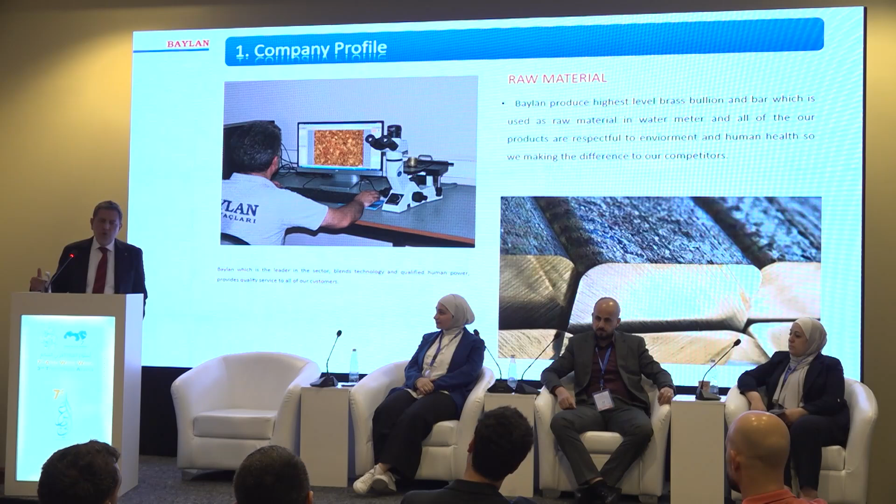If you have a brass body water meter, the client or the utility will ask you for a particular standard, like MS58. In this case, you have to make sure of the content of your raw material before going for casting or forging. Some parts are forged and some cast.

In the Baylan production plant, after we keep the content as required, we are not satisfied with this — we go and check the structure of the material. If it's not perfect, it's refused by production and goes back to the furnace.

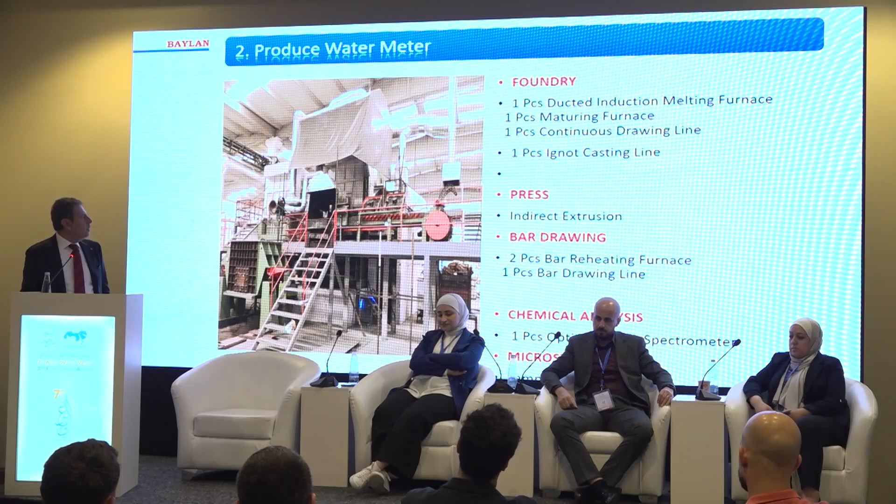Here are some views from the production plant. You see the furnace here, the casting, the design. Just wanted to show you some illustrations from the plant to give you an idea.

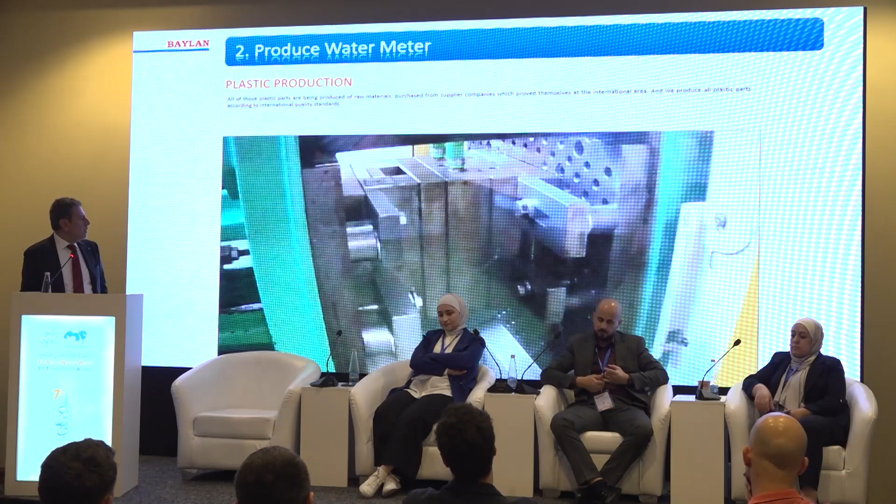Even the plastic parts for the mechanism are produced in-house, designed in-house. Here in the first picture you can see the assembly of the mechanism of the water meters. When it's finally ready as one piece, you have the lower body and the upper body, depending on the design, and then these three main parts go for final assembly and testing.

They go to the test laboratory, 100%. This is the research and development department I mentioned earlier. Some types of the meters we supply.

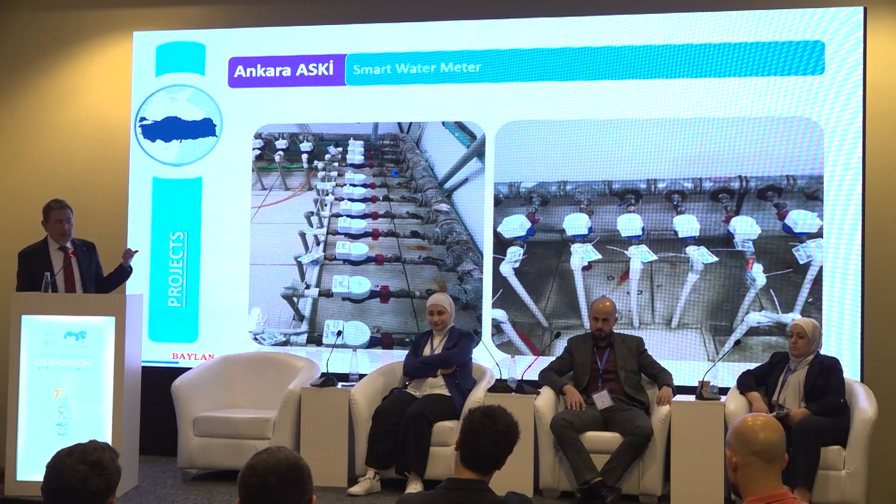This is in the capital, Ankara, some installments of our meters. The same in Istanbul, Bursa, Manisa, in Oman, Serbia, Ivory Coast, Senegal, Bosnia — and these are some countries we already export to.

So this is what we have done so far in Jordan with the utilities, and at the end we thought we had to add value to the country. We are happy with the results so far, but not proud, because we need to do more. That's why we decided to invest for Jordan and for the future of water in Jordan, and also for the next generation. We decided to invest in a testing facility at the beginning.

And now Engineer Merdan will explain what we are doing now. Thank you.

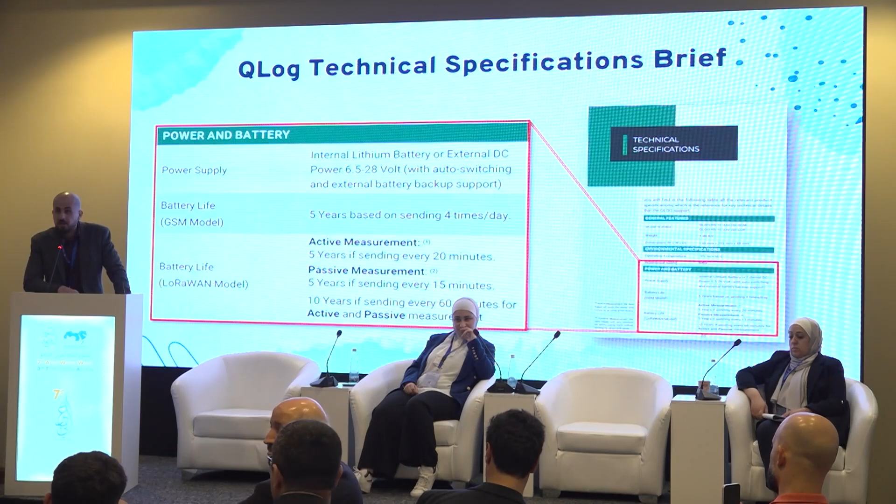من اهم الخصائص اللي حابب اركز عليها هي البطارية تاعتها. سيلولار سوليوشن بتقدر تعطيك 5 سنين زيها زي اي لوجر تنباع في السوق، بس اللي احنا طورنا عليه هو اول لوجر في العالم بيبعت الداتا باللورا، لانه اللورا راديو فريكونسي بتعتمد على لو باور، بتعطيك دبل اللايف تايم على مستوى البطارية، فبتعطيك تقريبا 10 سنين اذا بتشتغل على بعت الداتا مره كل ساعه.

برضه حاولنا تكون هاي اللوجر يونيفرسال، تضبط معك مع اي سوليوشن، فانت ممكن تشبك عليها كوميونيكيشن RS-485 مودبس، ممكن تشبك عليها بلس كاونتر للفلوميترز، ممكن تشبك عليها انالوج انبوتس 4 ل 20 ملي امبير اكتف اور باسيف، وبرضه بتاخذ من عندك 2 دي اي.

لما نحكي انه عندنا 4 ل 20 ملي امبير اكتف اور باسيف، فاحنا بنحكي انه انت يمكن باور ذا سنسور اتسيلف. فاذا عندك ابلكيشن somewhere where there is no electricity, you have pressure sensor or flow sensor, it will take the power from the data logger itself. And it can give you up to 5 years for cellular application and 10 years for LoRaWAN application.

وبدي اعقب على الجملة اللي حكاها المهندس تامر بخصوص الانوفيشن والقطاع الخاص والقطاع الحكومي. القطاع الحكومي بالمنطق أتوقع ينقص الوقت وينقص الإمكانيات. بس احنا كقطاع خاص بنطلع زي هيك افكار وانوفيشن ونطلب منهم اتليست تو تراست اس، نخلص من عقده الخواجه الموجودة دائما عندنا، انه اذا اجى حدا من اوروبا بناخذ السوليوشن تاعه 100% شغال، ما بكون عندنا اي داوتس انه ممكن ما يكون شغال، مع انه ابن البلد عارف وضع المائي للبلد، عارف انه بالاردن عندنا انترميتنت سبلاي، مش اي سوليوشن بزبط عندنا، عارف شو التطبيقات اللي بتطلبها شركات المياه، فبيطلع على السوليوشن هو كومباتبل مع النيدز تاعتك. فاحنا نطلب منهم بس تو تراست البرايفت سيكتور بهيك ابلكيشنز ويحاولوا يجربوه.

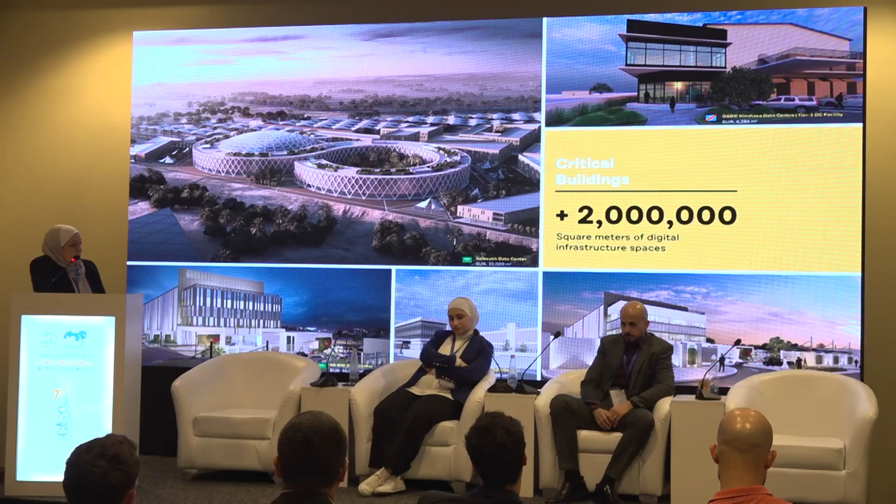Here you can see some pictures for key projects in the urban development and master plan, in the residential projects, the hospitality sector, the schools and education, the commercial and mixed use, the critical buildings like the digital centers, and the industrial buildings, also the life science and laboratories, the wellness and healthcare, and the mobility transportation.

The role of AJi in the water sector, we have clients in many countries. Mainly, we have the main governmental client in Jordan, which is the Ministry of Water and Irrigation and WAJ, and we have the Public Authority for Electricity and Water in Oman, and the National Water Company in KSA, and various other regional governmental bodies.

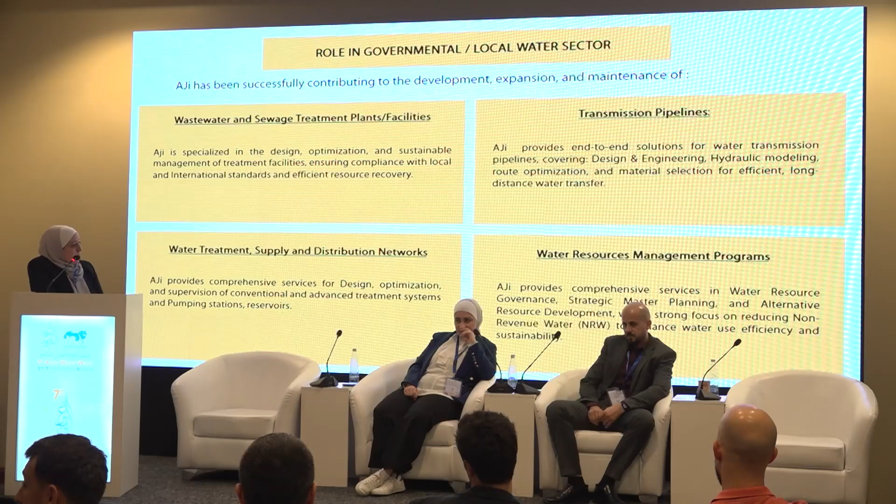We are contributing in the development, expansion, and maintenance mainly for the infrastructure, for the wastewater treatment plants, the transmission pipelines, the water resource management programs, and the water treatment and distribution networks.

Introduction. This project is located 20 kilometers east of Amman in Jordan. It's designed to treat the sewage received from Amman and Zarqa for the areas which are not connected to the sewer network.

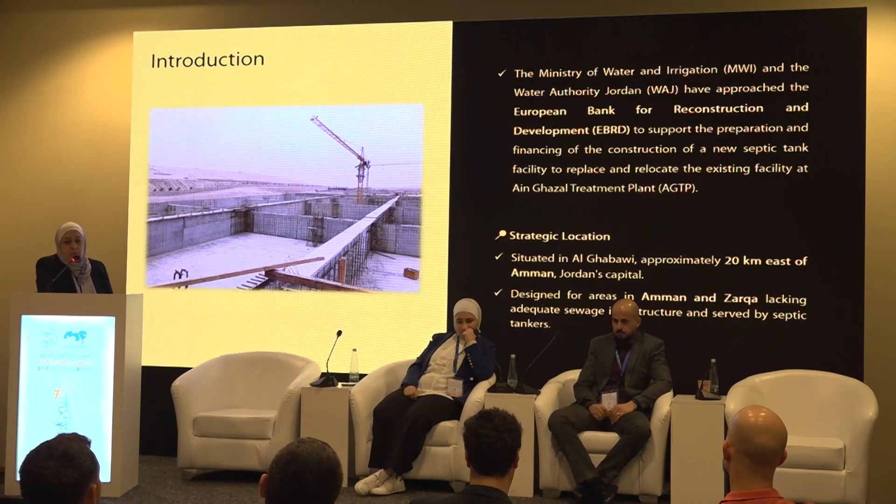The employer is the Water Authority of Jordan. The main contractor is ADCO, Arab Towers Company. We are the design subcontractor for the main contractor because the project is a design-build project, and we have Engicon as a consultant.

You can see here the location of the treatment plant. It is beside the Ghabawi landfill, within the red border here.

Highlights. This project was submitted at the London conference under the guidance of His Majesty the King. He presented many projects at this conference, including the Ghabawi wastewater treatment plant, some desalination projects in Hasban, the expansion of the Samra wastewater treatment plant, and the water reduction project.

Ghabawi is considered part of the national water sector plan aimed to develop a comprehensive wastewater strategy and to improve the environmental quality in Jordan.

The main objectives of the project: this project is very important and very strategic because it will be the first modern septic sewage treatment plant in Jordan. It is specially designed to treat the sewage, or septic, received by tankers for the areas not connected to the networks, as I told you before.

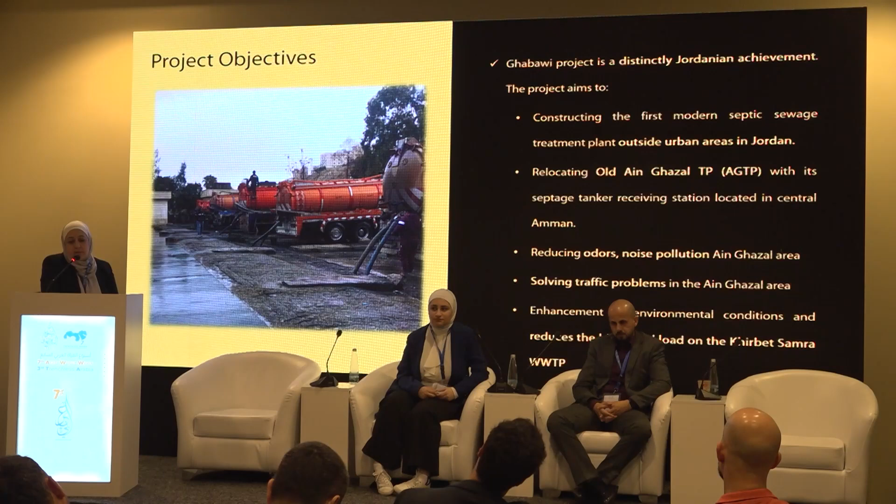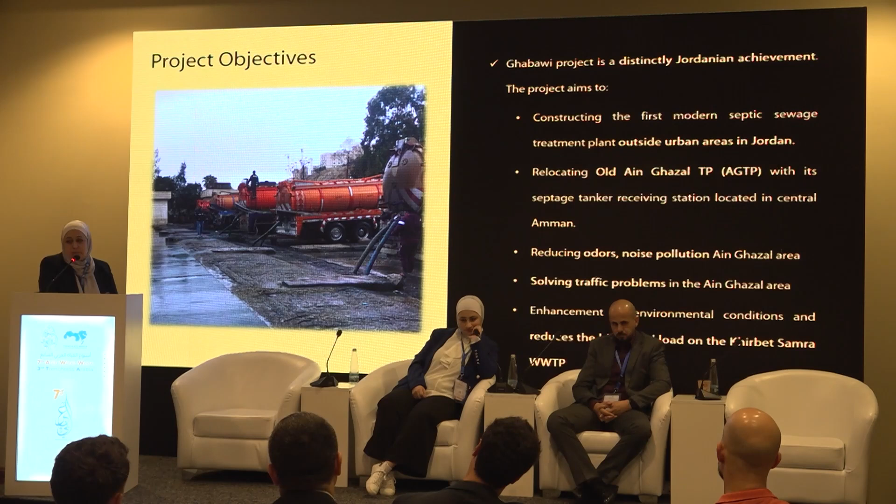The other objective is to reduce the load on the Samra wastewater treatment plant, because the sewage received by tankers in Ain Ghazal is currently discharged to Samra, and the heavy loads of these septic tankers cause problems there. By treating the sewage inside a special treatment facility, it will reduce the problems at Samra.

The long-term benefits are to provide employment and training opportunities for the local community, and to improve the quality of life for residents in nearby areas by serving them with a treatment facility instead of tankers, to align with the governmental urban development plan, and to support the economic modernization vision.

It's a milestone in the water sector, as it is designed to treat a capacity of around 25,000 cubic meters. The land used for this treatment plant is around 300 dunams, and it utilizes sewage tankers. It treats the sewage, the wastewater received by sewage tankers, and it is mainly funded by the European Union and the EBRD.

This project was awarded the Bronze Global Sustainability Award from the EBRD in 2022 because it is committed to sustainable development and environmental protection, and this award helped in funding and financing the project.

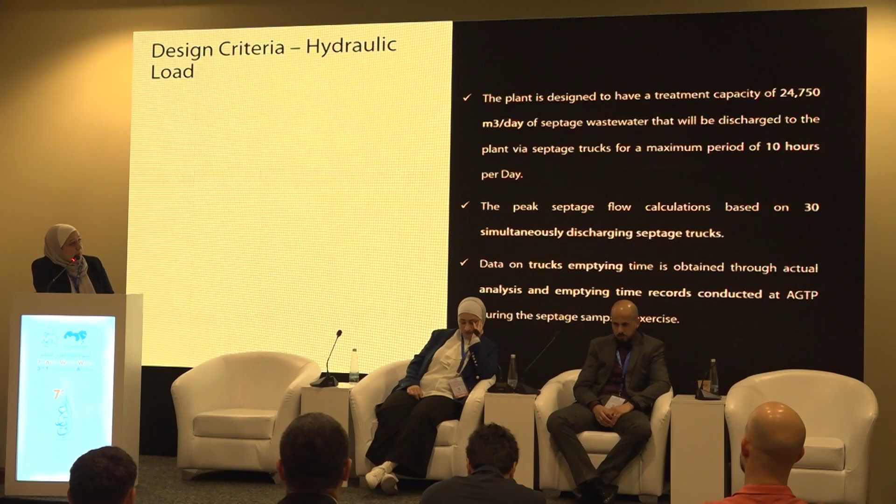The main hydraulic design criteria was based on receiving the wastewater by tankers through 10 hours per day. And the hydraulic calculations were based on 30 tankers discharging to the facility at the same time. This is a challenge for the design, because 30 tankers at the same time with a very high load of pollutants in the wastewater was a challenge in design.

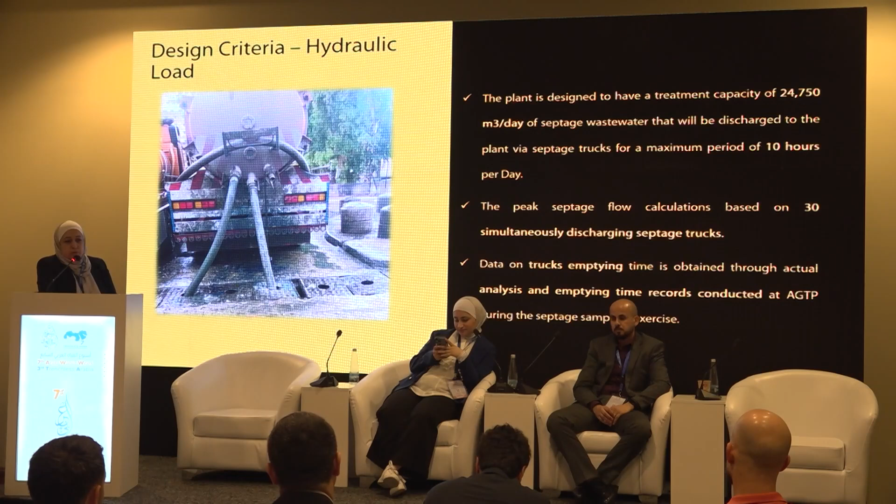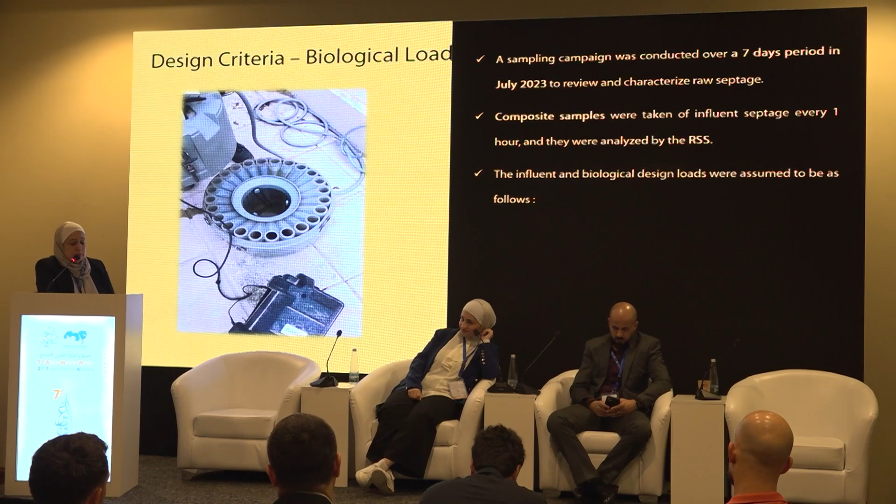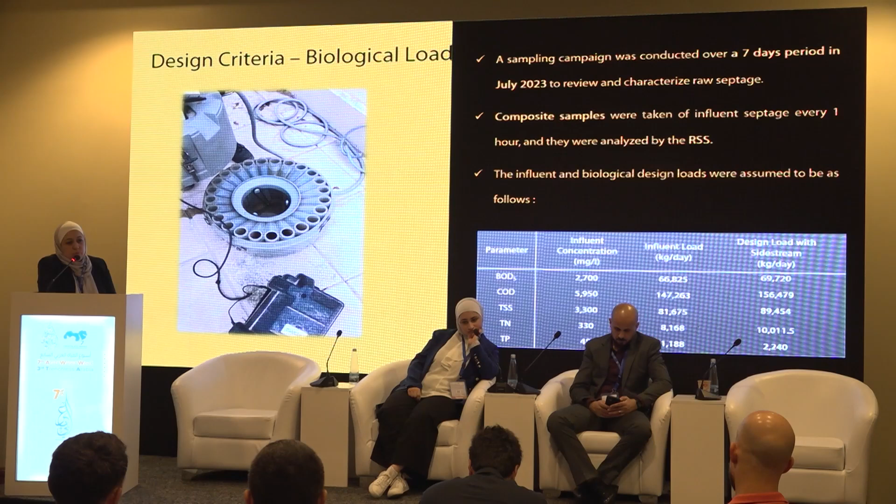About the biological load, a sampling campaign was conducted over 7 days to get actual data about the concentration of pollutants in the wastewater received by tankers. The analysis of the samples was conducted by the RSS. As you see, the sewage received has a very high load of BOD, around 2,700, and the TSS is around 3,000, which is 5 times the ordinary wastewater characteristics. So it will be another challenge in the design.

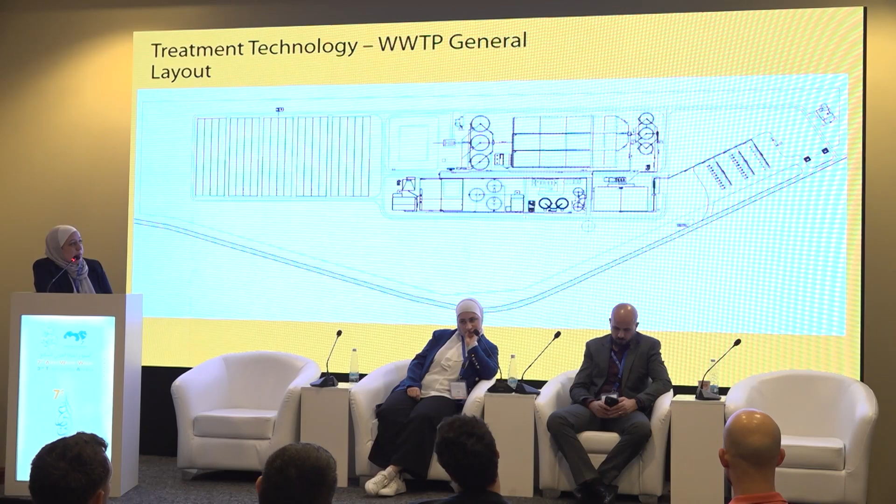The treatment technology. Here is the layout of the treatment plant. It is like other similar treatment plants, but you can see at the beginning of the treatment plant there is a special area for the tankers to discharge their sewage into the plant. The liquid stream is a conventional activated sludge. Like other treatment plants with the same technology, it has mechanical screening, primary settling, anoxic and aerobic zones in the bioreactor, secondary settling, and finally tertiary treatment and disinfection by chlorination.

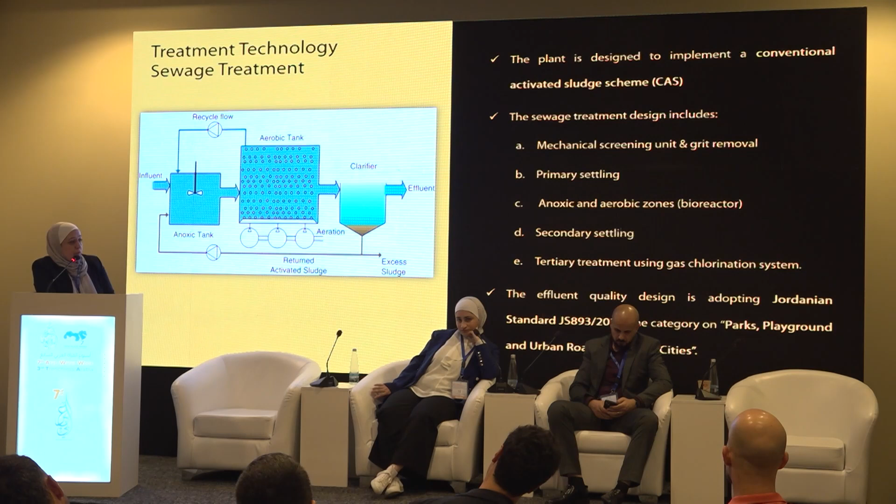The wastewater treated in this treatment plant will be used for irrigation according to the Jordanian standard for parks, playgrounds, and roads. Here is the process flow diagram for the treatment plant. It includes all the process units.

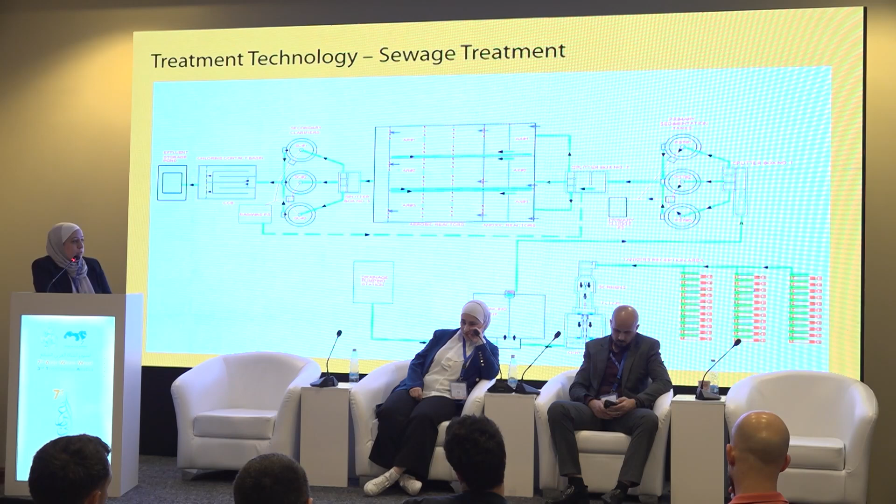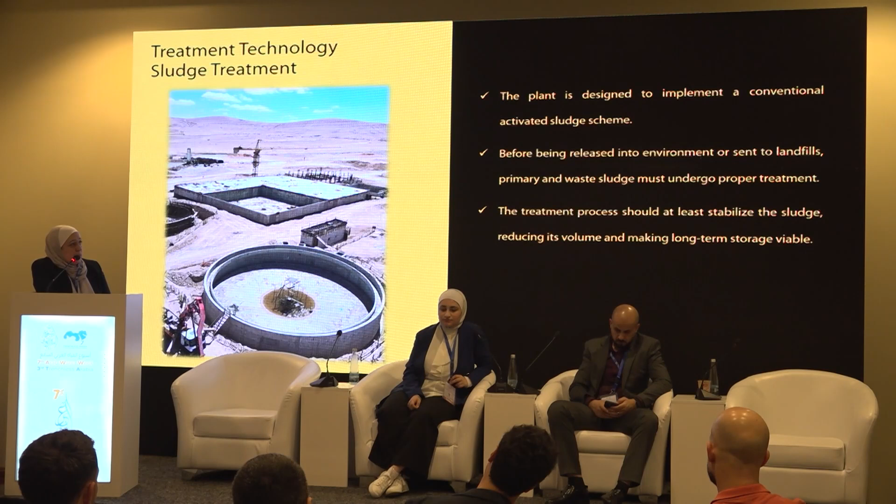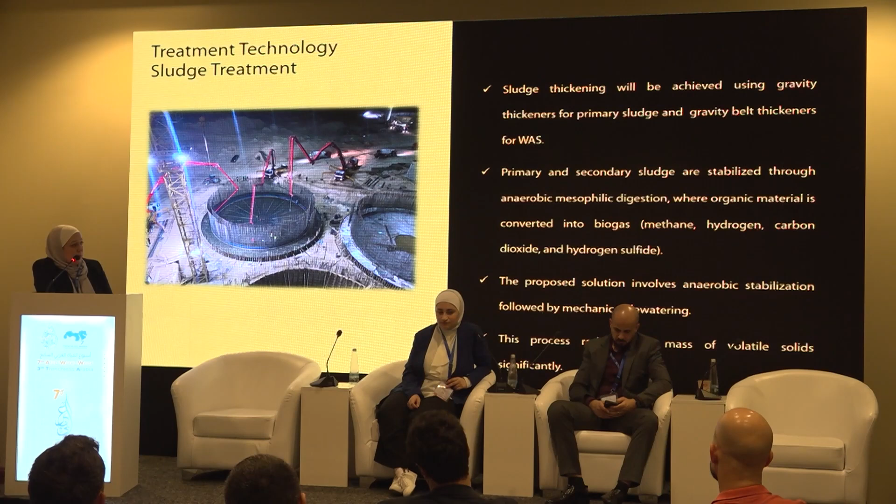Now about the treatment of the sludge. Before we send the sludge to the landfills, it should be treated in a proper way. The first step of the treatment is thickening, using gravity thickeners for the primary sludge and gravity belt thickeners for the waste activated sludge. After thickening, the sludge will be stabilized in anaerobic digesters. In these anaerobic digesters, biogas is produced and we can use it for power generation.

Here you can see the digesters, which are under construction. This treatment plant is still under construction, and we are the partners of the main contractor in the design, and the design and construction are going in parallel in this project. So from time to time we go to the site and take some pictures for our design team, and we are happy when we see them actually inside.

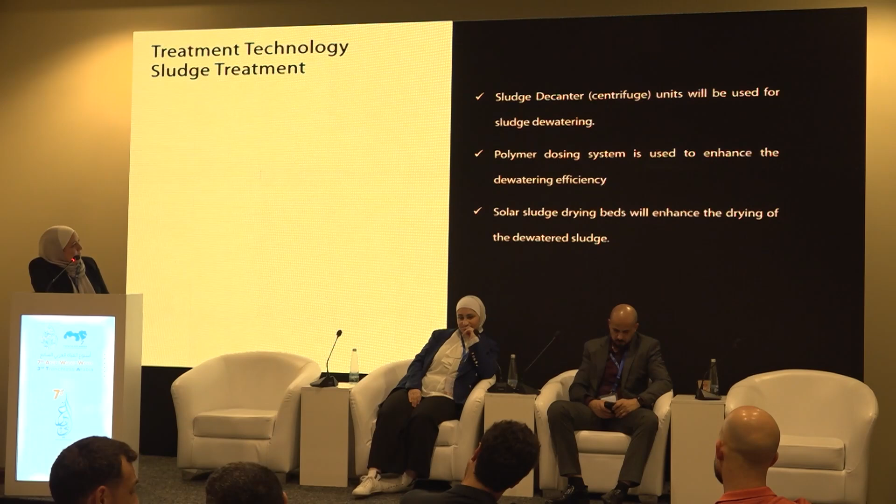After digestion, the sludge is dewatered using a sludge decanter, and to enhance the dewatering process, we use a polymer dosing system. Finally, greenhouse solar beds are used to dry the solids to reach about or more than 80% dry solids. Here are the greenhouse solar drying beds; they are still under construction, but finally they will look like this picture. The area of the greenhouse drying beds is around 42 dunams, which is very huge compared to other greenhouse drying beds in the area.

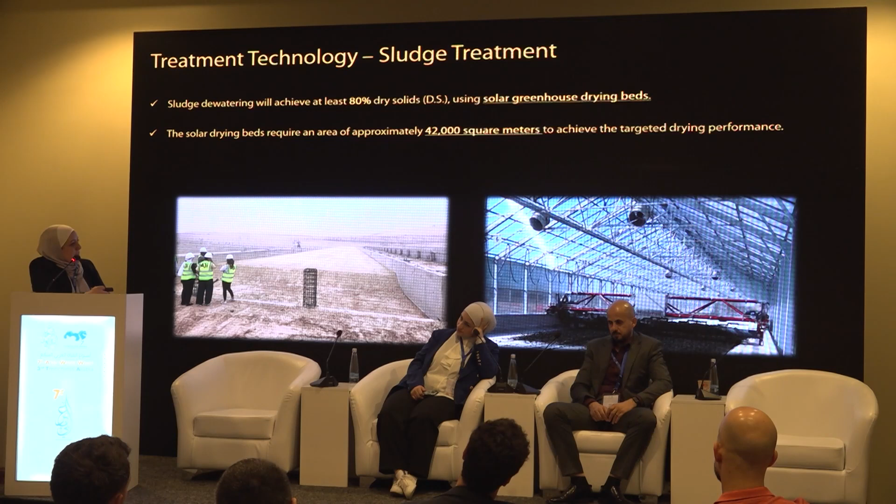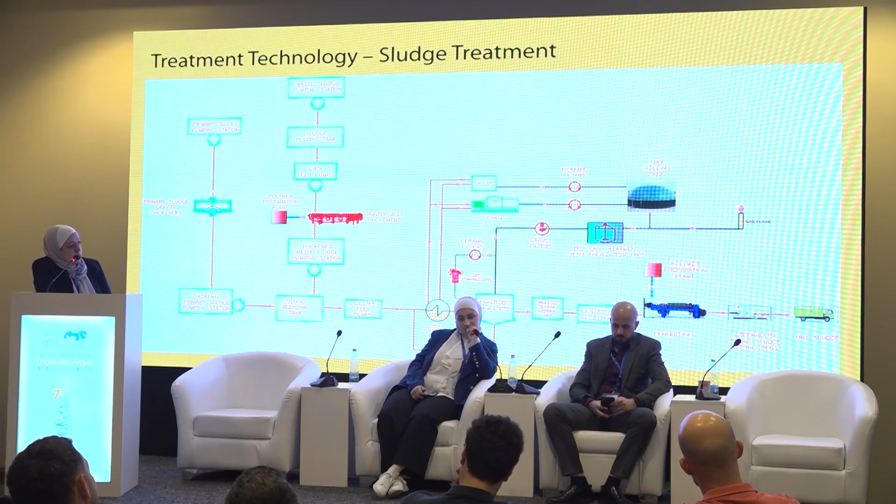Here is the process flow diagram for the sludge treatment, which summarizes the processes. As you see here, the primary sludge and the secondary sludge are thickened and go to the anaerobic digesters. After that, they are dewatered by centrifuges and finally go to the greenhouse drying beds. And the biogas produced is used in power generation.

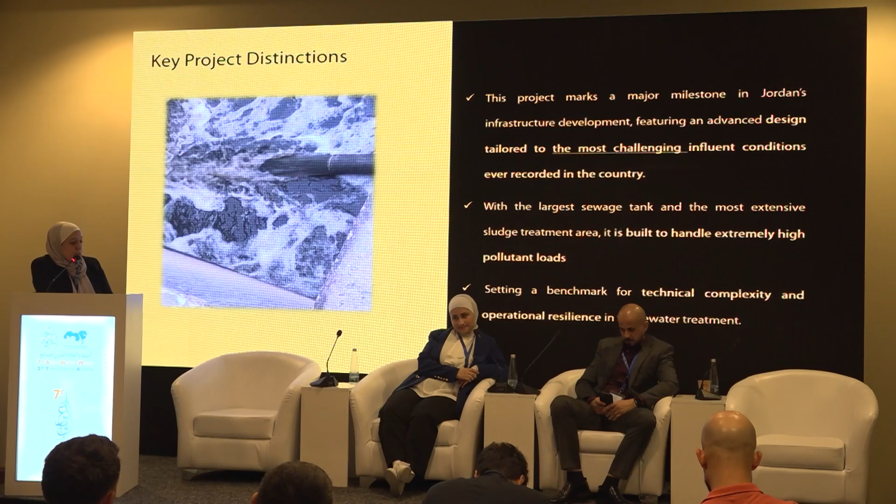The distinction of this project is that it is designed to treat the most challenging influent. You know that septic tankers have a liquid with very high concentration, and there are variable characteristics for this sewage. So it was very challenging in the design to adopt the most suitable parameters. It has the largest sewage tank in Jordan, and it is a benchmark for its technical complexity and operational resilience.

As you see, the digesters here are the biggest digesters in Jordan. These tanks are very huge. We don't have digesters as a separate tank in our treatment plants in this size. The diameter of each digester is around 23 meters, and the height is 33 meters. The total volume of them is the second biggest after Samra.

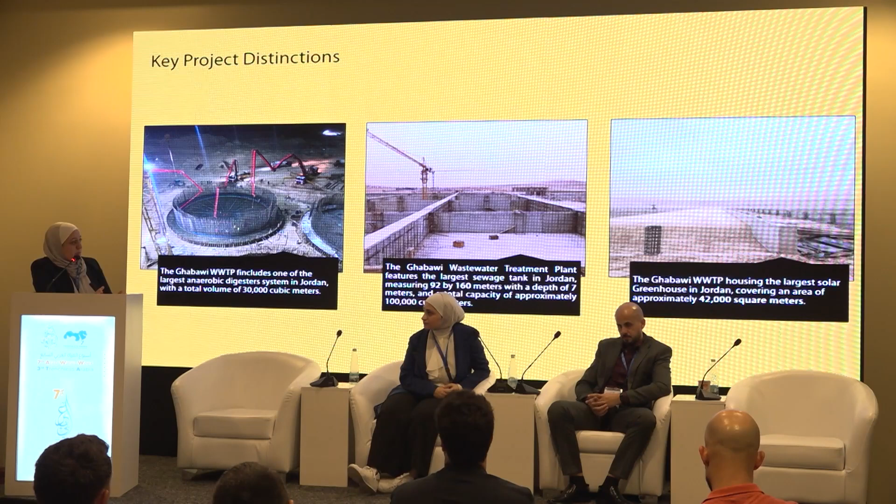As a bioreactor, it is the biggest in Jordan because all the trains or compartments are combined in one tank, and the volume of this tank is 100,000 cubic meters, so it's the largest sewage tank in Jordan. And about the greenhouse, as I mentioned before, it is also the largest area in Jordan and also in the region, because the very high concentration of TSS and BOD produces very large quantities of sludge, and to reach the 80% dry solids, you need a very huge area.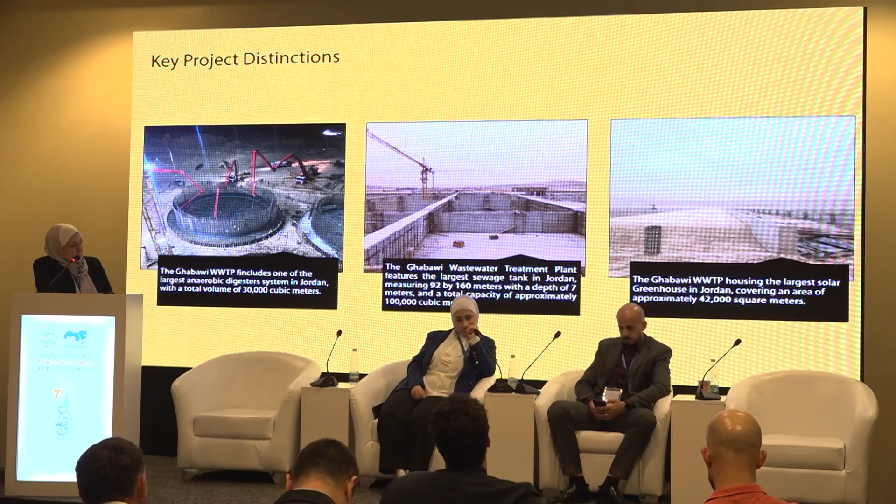This is all about our treatment plant, Ghabawi facility.

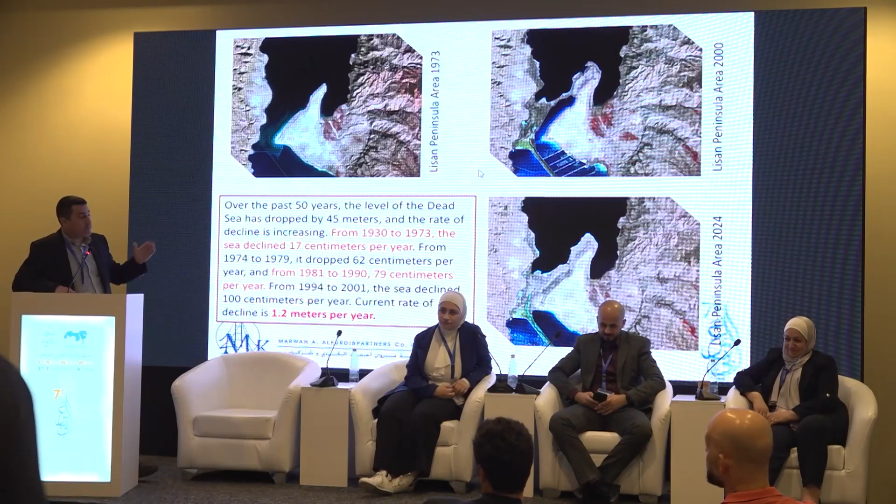The purpose of the dam is to trap the floods through the wadi. Once the flood is retained, the natural permeability of the reservoir will allow the water to percolate underground and recharge the aquifer.